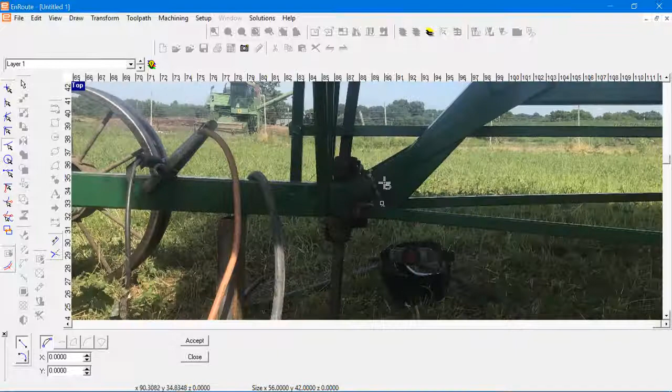So what I got going on here is I welded this back together out in the field. I really need a brace right here. Now, I didn't have much metal on the truck. I could go and maybe get some and piece it together and weld it, but I decided not to do that, so I just came back. I'm going to cut it. Now, I took the picture. All I did was take this one measurement right here, okay?

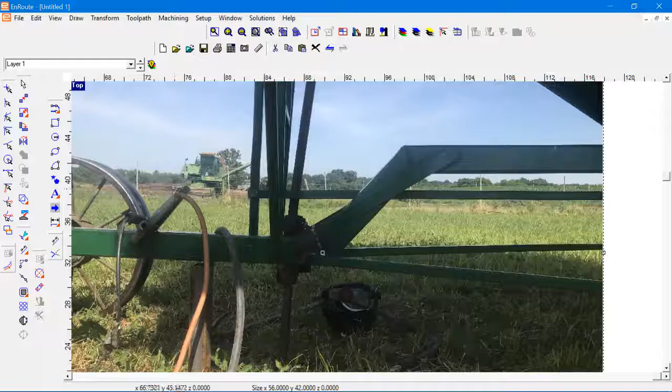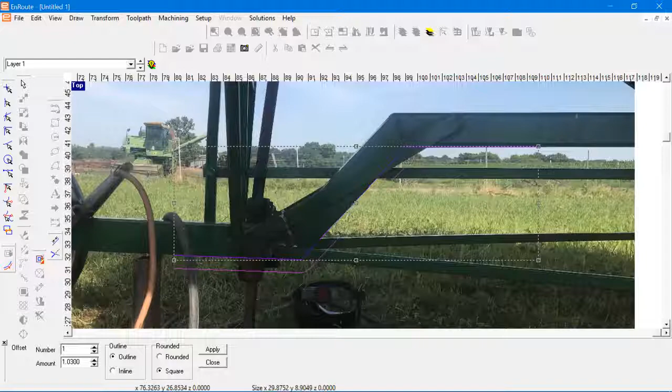And this is going to be a rough go at it here. Bring in our line tool. I'm just going to trace it and get it pretty close. Right there. Okay, so I brought that in. Offset. We're going to put an offset in it about an inch. I think I made it about an inch. So we'll apply the offset. And then all I did was bring one more line right here, because this is where I took my measurement from.

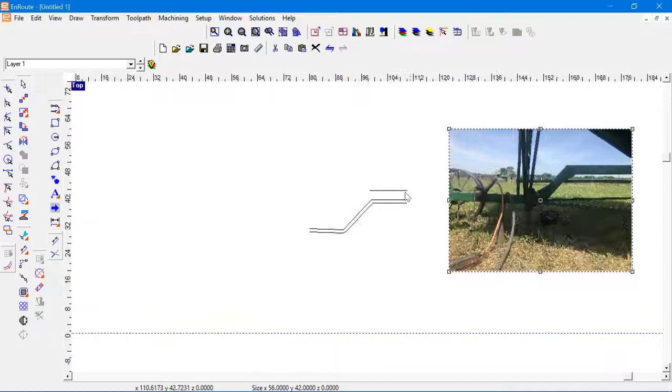Now, a lot of times, like I showed you, you'll go to scale something and you do your X or your Y. I mean, it's a way to do it. Now, this is not going to be like that. I need this to be 3 inches, and I can't scale my X or my Y. It doesn't work. So what I'll do is I'll click on this contour tool. So I hit my line. See what I'm at. 2.643.

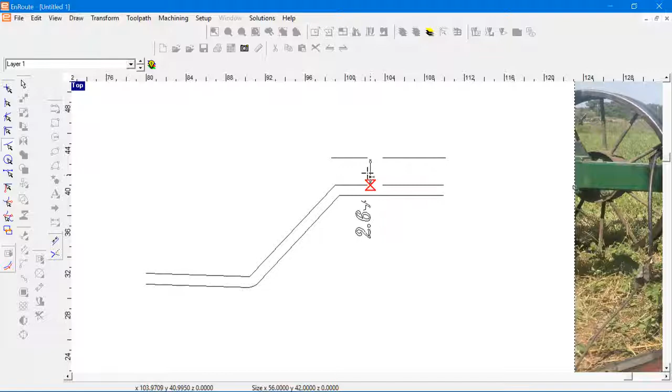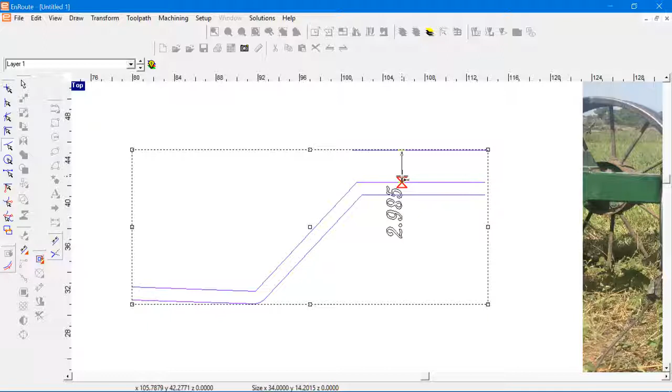So here's how you'll get it. I got to get it to 3 is all. You just got to keep fumbling with it. You got to scale. Leave it proportional. I'm just going to throw a number out here like 33. We'll go 34 actually. And apply that. Like I said, you just got to mess with it until you get it right. We'll see where we're at now. 2.985. That's pretty damn close to 3. So I'm actually just going to leave that. I got lucky on that number.

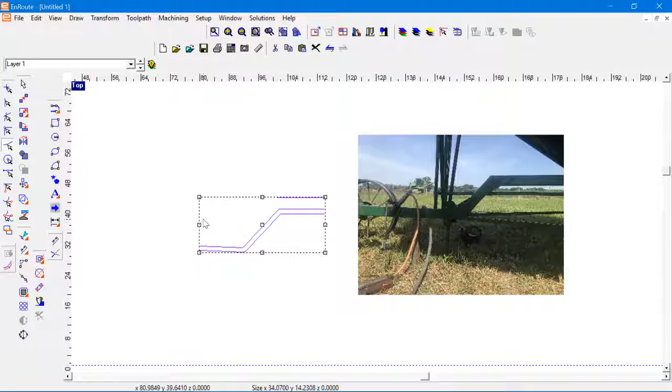But if you wanted to get a little closer, we can bump the scale up. You just got to keep messing with it. Keep checking your measurement. If you need to be dead on 3, let's check it. 2.991. Again, even closer. So you just got to scale it and keep taking your measurements back and forth is all you got to do. And so I did that. I took this 3-inch measurement. And right now we don't need this. We know our scale, right?

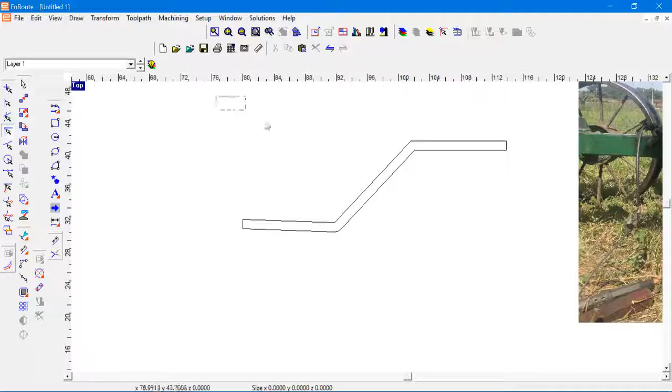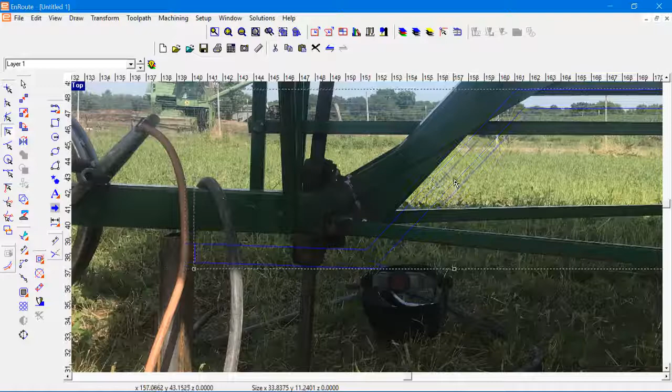And when I went and did it, it came out on the money. It was a real tight fit up against this thing. And honestly, I probably would have been out there for 45 minutes or something, just getting pieces of metal that were on the truck and piecing them together. And it wouldn't have been a solid piece. I still would have had to weld it all, and it just wouldn't have been that good. It would have been a little sloppy, to be honest. So I just came back into town and did this number here.

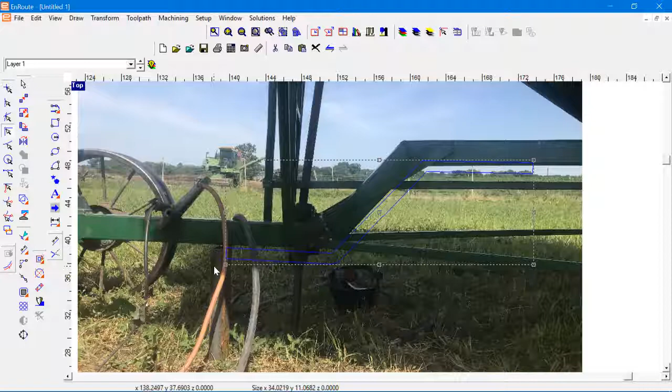Let's see. I don't know if it's going to line up on here, but yeah. Anyway, when I went out and fit this piece on, it fit awesome. Like I said, I could have pieced stuff together for 45 minutes. I think I put this up in there and welded both sides of it all the way through in like 15 or 20 minutes. And honestly, it's probably stronger. So that's just a quick way to do stuff like that. I'm going to show you all one more here.

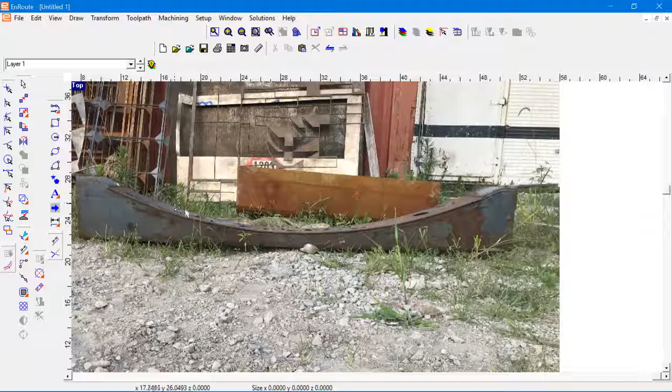It's this right here. Okay. So you could, I mean, there's a lot of ways to do it. You could go in here, get your tool and trace and, you know, do all that, whatever. I took a pretty easy approach to this, okay? So what I did is I pulled this measurement right here. I pulled this measurement. This is actually, I did this on the actual piece.

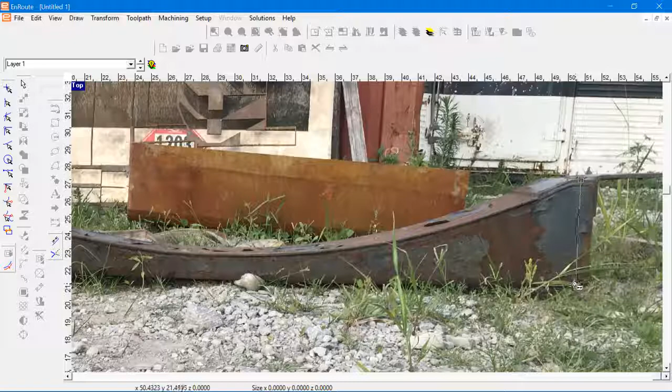It was 43.7, we'll say. Okay? And then I went and I pulled this measurement on the actual piece. Let's see what it is. 40, what did I say? 43.7. And then looks like we got about 6 here. So here's how I did it. Oh, well, we'll pull the other measurements in a minute. Go ahead and just do your measurements. 43.7 and 6. I already did this a minute ago, so it's already saved.

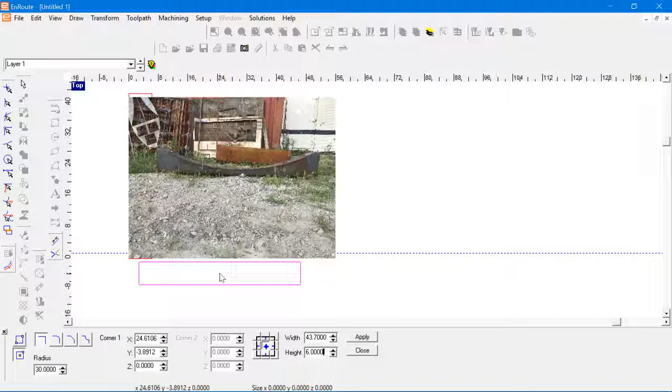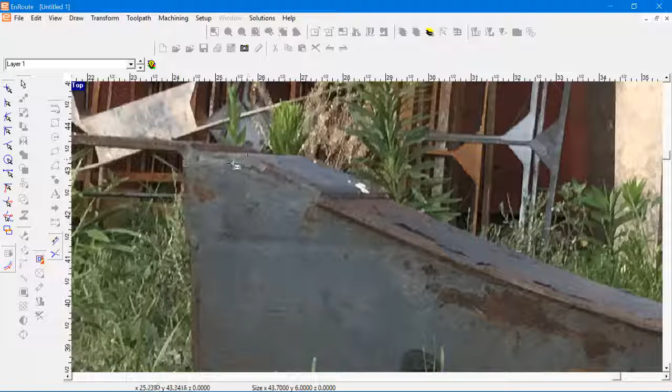And also what I did is you're gonna want to bring it to where this lines up down here in your corner, because you're gonna have to put some guidelines. Actually, there's already one in place. Okay, so you just make you a square. Go in here. You got 2 more measurements to pull. No big deal. You're gonna pull from your edge to your tangency, which a tangency is where the breakover point on something starts. So we'll say it's 1.37. Okay, 1.37, and we're gonna do this one.

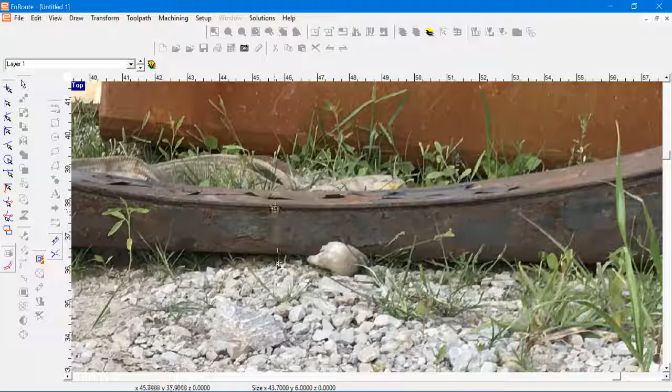This is right here. We're gonna pull from about here to here. Like I said, I'm pulling these on the actual piece, not in the photo. I had the piece handy, and 1.3. Yeah, I just had the piece handy, so I just pulled some measurements. Pretty easy, actually, probably faster than this. So, all right, those 2 measurements right there, not bad.

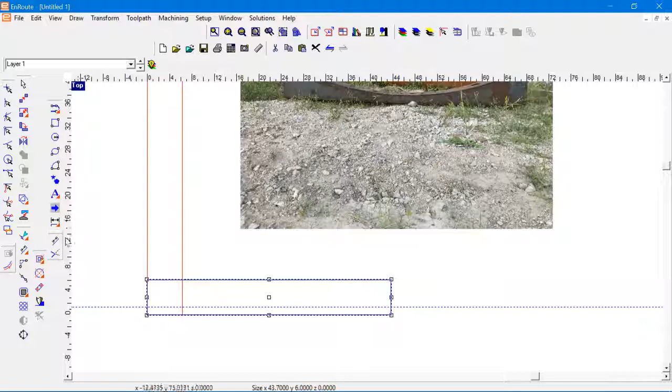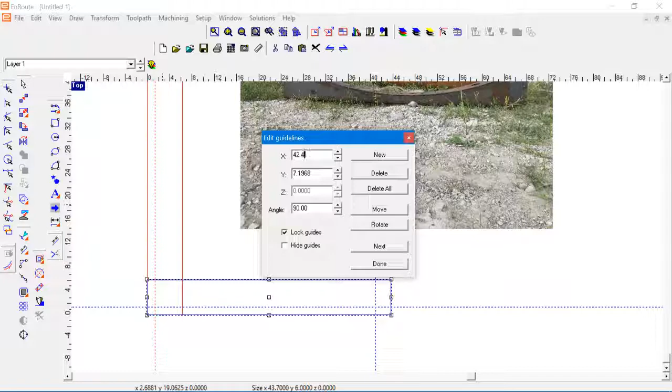So pull you one guideline, pull you another guideline. This guideline here, we said that distance to that tangency was 1.3, so I'm going to do x. 1.37 is actually what it was. Move that. Go to your next one, and on this one here, we were at 43.7 total, so you're going to want to take that 43.7 and then minus your 1.3. 42.4 is what I'm getting. 42.4. Move that.

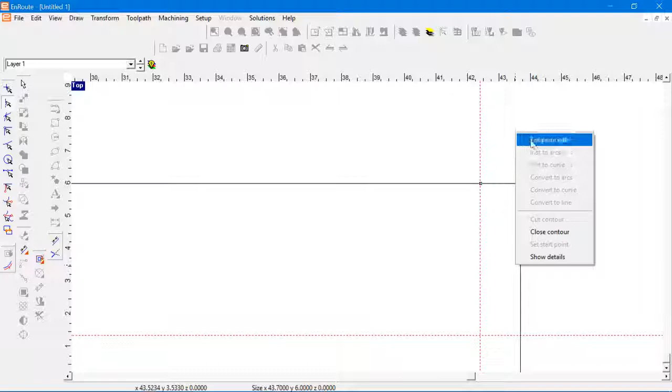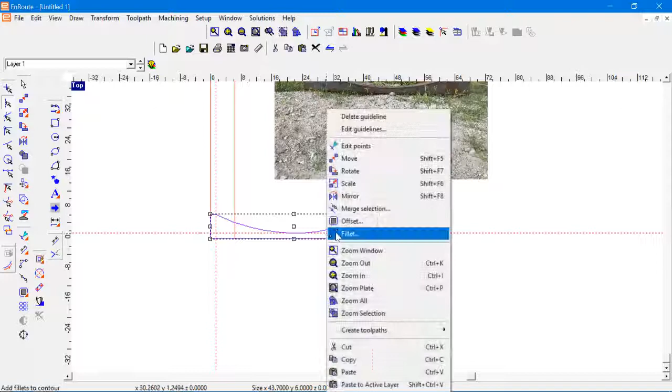Okay. Now, these guides are there because that's where your tangency point is. This is where you're going to make a break. Hit your guideline snap so you stay on it. Right click, cut it. Right click, cut there. Okay. And this guideline here is actually already right, this measurement here, this 1.3, so leave your snap on and just take your point editing tool, go out in the middle here somewhere, and then just boom, right there it is. Go ahead, right click, and then merge your piece.

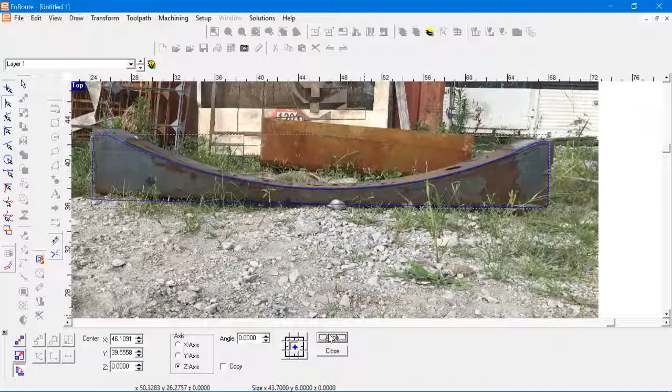I did it like this. I mean, it took me just that long to do it, and it come out perfect. It come out right on. Like I said, maybe not with this picture here, but on the actual piece, it worked out pretty well. Yeah, that's kind of close on this piece too, but just that quick, man. I could have traced and done this and that, but if you can do stuff like this, it's so simple. And the thing is, it's going to be right. It's dead on the money.

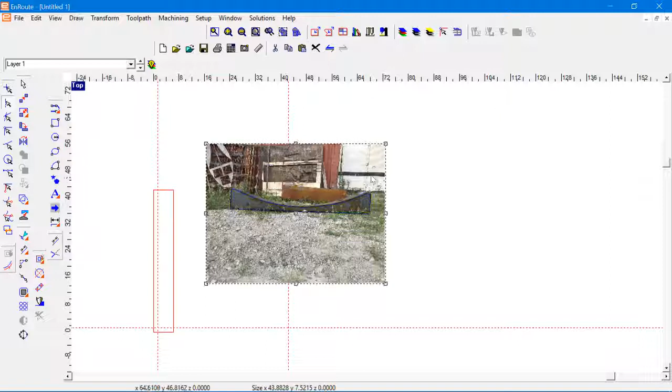So those are just a couple quick ways that I would do it. Like I said, there's a ton of ways to do things, but try to keep it simple. Anytime you can make your own lines, go create your own little lines and your own guides, seems to be the best way, as opposed to trying to trace this and then maybe straightening out your lines and kind of guessing a little bit. Anytime you can just make your own from scratch, they're way easier to work with, and you'll have a lot more accuracy too.